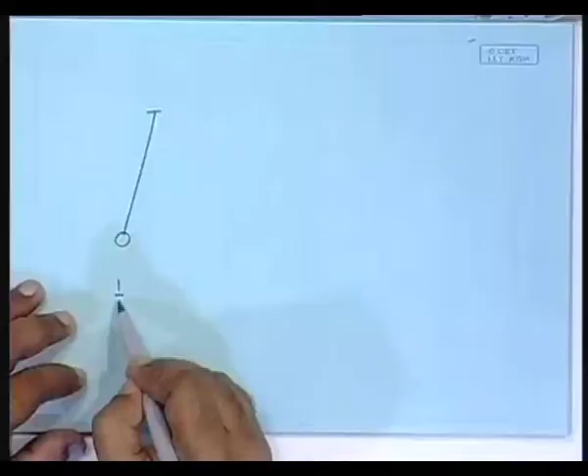As I told you, one possible thing is simply to visualize a pendulum whose bob would move in a to and fro motion with a certain frequency, the natural undamped frequency, which would be 1 by twice pi root over g by L. So that would be the frequency of oscillation if there had not been any additional forcing, but suppose it is given additional forcing a sin omega t - that omega, the frequency associated with it, is an additional frequency component.

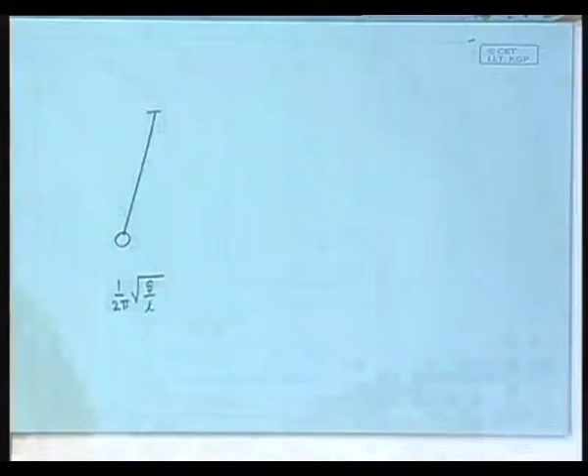That immediately tells you that there are two ways to picture the frequencies. One frequency in this case is the additional frequency imposed from outside, but what is the frequency of this other one? That is the small amplitude frequency, meaning the frequency you can identify under linearization. So that is the natural frequency identified under the assumption that the oscillations are not very large.

So in that case it would be a linear system on which you have given a sinusoidal perturbation. But of course, in a linear system you are not allowing any scope for the two frequencies to interact, right. In a linear system, if there is no nonlinearity, then they cannot really interact. If you add some nonlinearity - in this case if you simply model the pendulum and allow it to oscillate over a large amplitude, it becomes a nonlinear system.

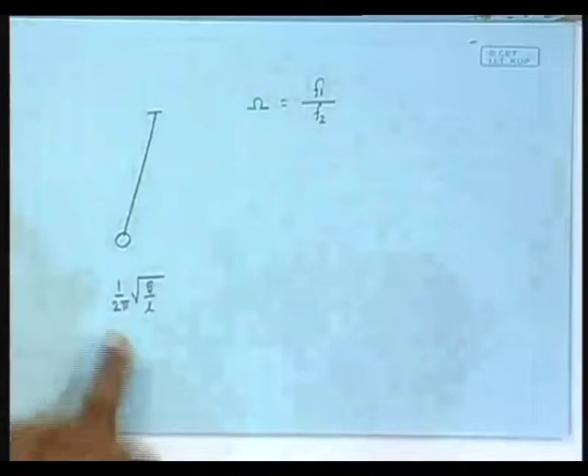So in actuality the frequency will not be this; in actuality the frequency will be something else. So you can identify two types of frequency ratios. One is called omega, which is simply f1 by f2, where f1 is the frequency imposed from outside and f2 is the natural undamped frequency - then this omega is the ratio. Therefore it is not the ratio of the actual frequencies; the actual frequencies of the system are not that ratio. This omega is a sort of idealized ratio, called the frequency ratio parameter.

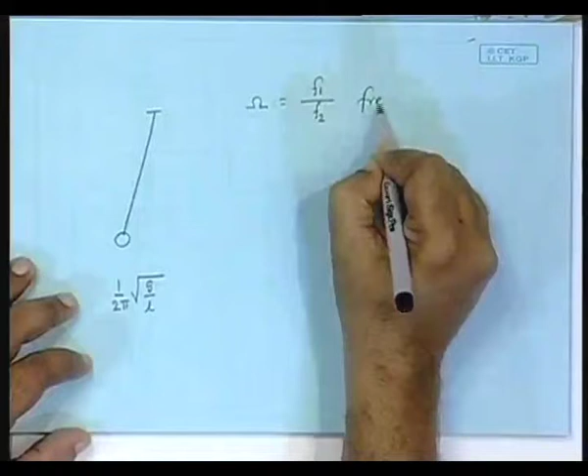And the forcing frequency - yes. But while you are forcing, if you solve the differential equation, you will generally find that it basically oscillates at the forcing frequency. That's true. Ultimately, it will oscillate at the forcing frequency.

Agreed, but still we can identify a number like this, because if you do not apply the forcing, it will oscillate at this frequency, and you have given the forcing, so you can identify, at least in theory, omega as these two frequencies. It's not the actual frequency of oscillation.

So it is just the frequency ratio parameter, somewhat idealized. But the actual thing is called the omega parameter, or winding number, which is f2 prime by f1, where f2 prime is the actual frequency of oscillation of the bob.

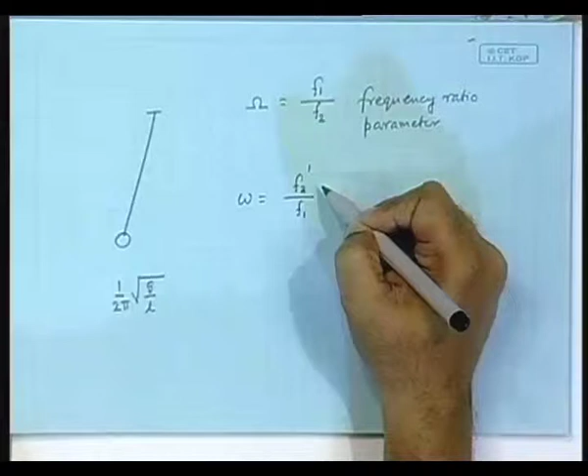So in this case we are allowing the nonlinearities to come into the picture. f1 prime by f2, or f2 prime by f1? Oh, this one would be f2 by f1.

Sorry, so f1 is the natural frequency - no, f1 is the externally imposed frequency, f2 is the natural frequency, and f2 prime is the actual frequency of this oscillation, taking into account the nonlinearity. What is omega called? This is called the winding number.

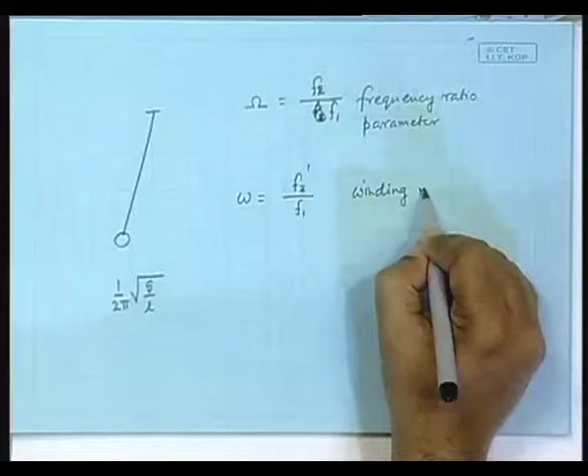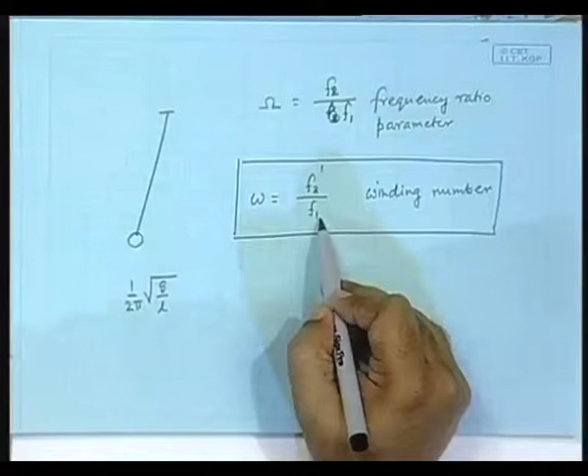Actually, this is the more important thing, because that is what you actually see in the system, and this is sort of an idealized value. It is not difficult to see that if the winding number is a rational number, you have a periodic orbit, and if it is irrational, you have a quasi-periodic orbit. So ultimately our point of concern is the winding number - that is what distinguishes between periodicity and quasi-periodicity. Clear?

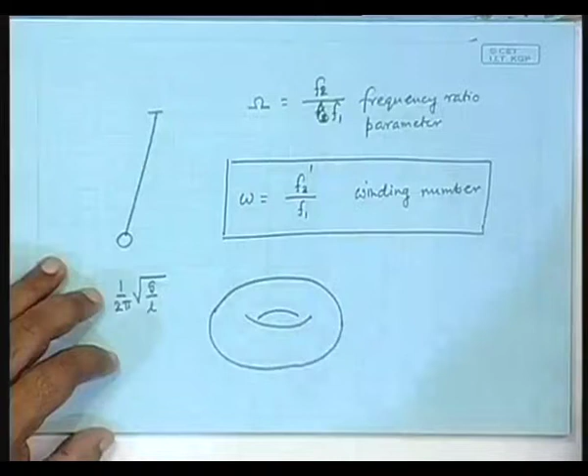So suppose the winding number is 2 by 3. In that case, what will you see happening on the torus? Imagine the torus, and imagine you have placed a Poincare section here. What will you see on this Poincare section? Essentially, the section of the torus would be a circle, but you will not see the full circle, because when W equals 2 by 3, it is a rational ratio, and therefore you will see a finite number of points. How many? Three points.

So what will happen is the three points are here, here, and say here. Starting from here it will go around and hit somewhere here, go around and hit somewhere here, and go around and finally come back here. That is the behavior - by the time it makes 3 rounds on the big circle, it makes 2 rounds on the small circle, and that is why the ratio is 2 by 3.

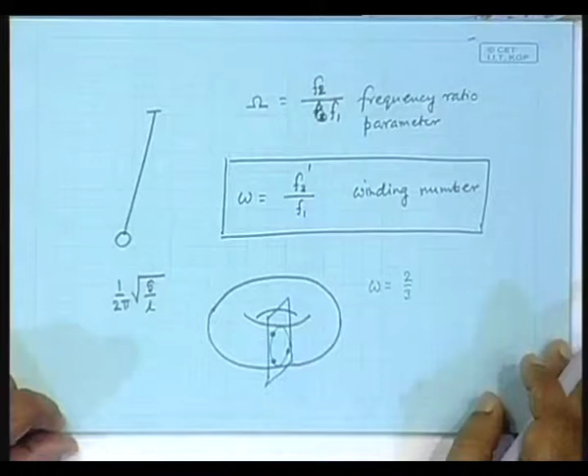Now, how will we differentiate irrational and rational numbers? In the sense that, suppose this f2 prime and f1 - how can we say it's irrational or rational in a real system, since we cannot always say it's exactly 2 by 3? His question is how can you really say it is rational or irrational, because in the immediate neighborhood of every rational number there is an irrational number, and in the neighborhood of every irrational number there is a rational number. How can you say that?

Yes, of course you say this with finite precision of your calculation, but soon we will see that we can do a lot of coarse-grained calculations - just wait till the end of this class, I will explain how. Because of the mode locking, as I explained in the last class, mode locking happens over a large parameter range, so the rational ratios will occur for a large parameter range. That is what allows us, even with rough, finite precision arithmetic, to calculate and find out that it is really a rational ratio. But we will come to that.

The point is, let us now develop this circle and see what is happening. Suppose here is a circle, and suppose there is a point - not exactly this situation, but another one - the initial point is here, and before coming to the next one it has gone around once and fallen here. It is possible. Now, will the Poincare section be able to distinguish between these two situations? No.

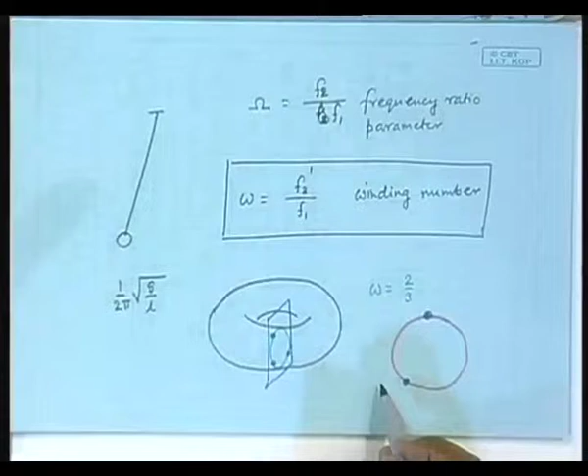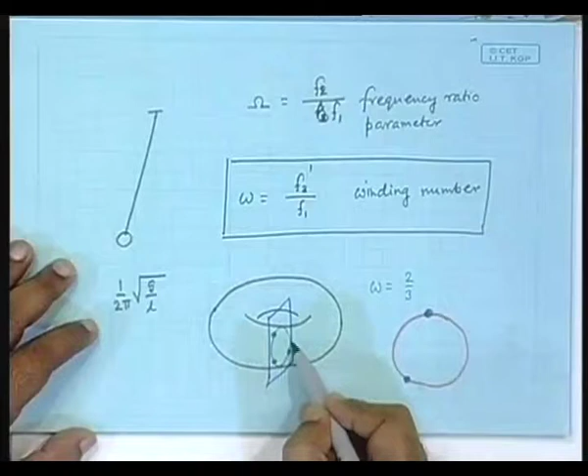That means it started from here, and as I explained, it goes around and comes back here. Suppose it does not do so, rather it goes around once more before coming here.

Looking at the Poincare section, we will not be able to distinguish it. That is why when talking about these mappings, there is no point discussing 2 pi rotations. That is why you always take a modulo 2 pi, or if you say the whole rotation is 1, then you take a modulo 1. You understand what modulo 1 means?

That means you subtract all the whole numbers. So if the winding number comes out to be say 1.7, this simply becomes 0.7. As far as the Poincare section is concerned, 1.7 is the same as 0.7. But we have to understand that something has gone on - it has gone around the small circle one more time without intersecting here. We have to keep this in mind, but on the Poincare section that might not be visible.

Now let us come to a very simple situation by which we can understand these things. Whenever we were talking about dynamics, we found it very convenient to understand things in terms of maps. We have understood the logistic map, its behavior, how to calculate the fixed point, how to find the stability of a fixed point, and on that basis we can do a lot of things.

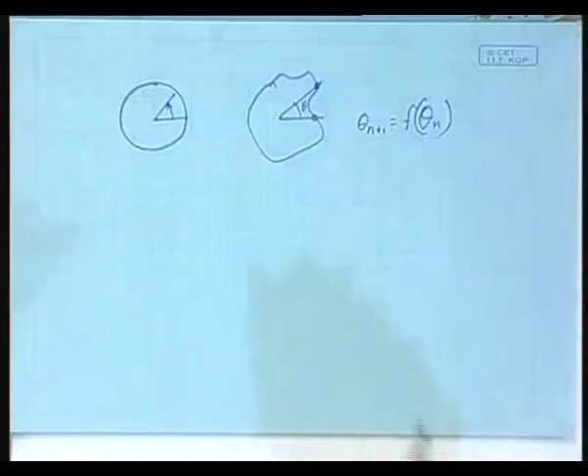So it will be convenient for us to define theta, and if we can define something like theta n plus 1 equals a function of theta n, we are through - we can define the dynamics. So the cross section of the torus is a topological circle, meaning that if it is an ellipse, it is still topologically the same as a circle - it is a closed loop, that is all.

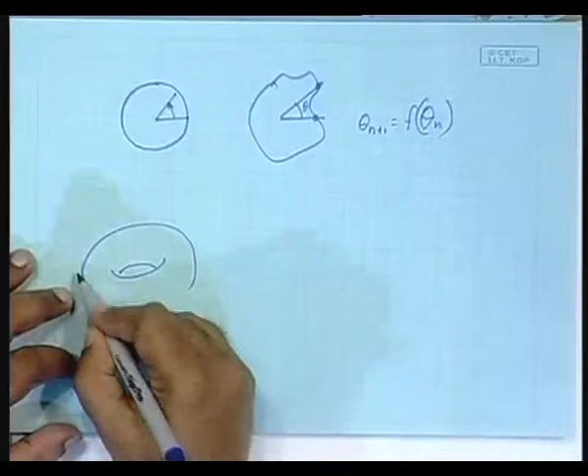So how do we define the center? Center you don't need - but to find the angle we need the center. No, you don't really need the center, though you do have the center. Wait a minute, you do have the center, but you don't need it. Why do you have the center? Because how did this torus come into being?

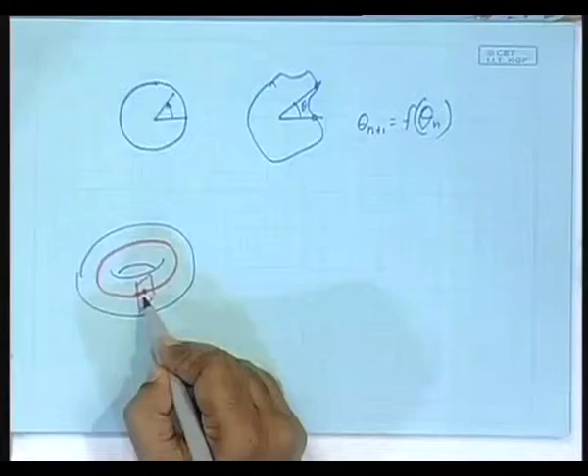Initially it was an orbit like this, which became unstable, right? When the orbit was like this, if you place a Poincare section, it was a point that became unstable. When it becomes unstable and develops into a torus, still this unstable periodic orbit is there, and that can serve as a center.

So the unstable periodic orbit is there, so that can serve as the center - though normally anything inside the closed loop can serve as a reference point from which you can measure theta. But it would be convenient for us if we can locate that unstable fixed point, to measure from there.

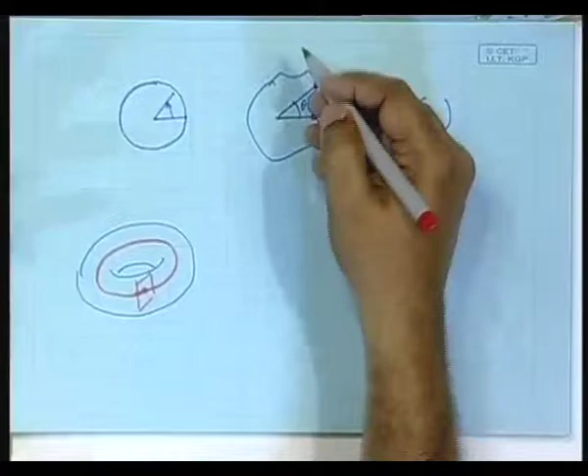The point I am making is that when you are defining in terms of theta, you do not really need to consider whether it is bent or crooked or whatever, so long as it is a topological circle, it is fine. So long as you can eat the donut as a donut, it is fine. So we have to define it something like this.

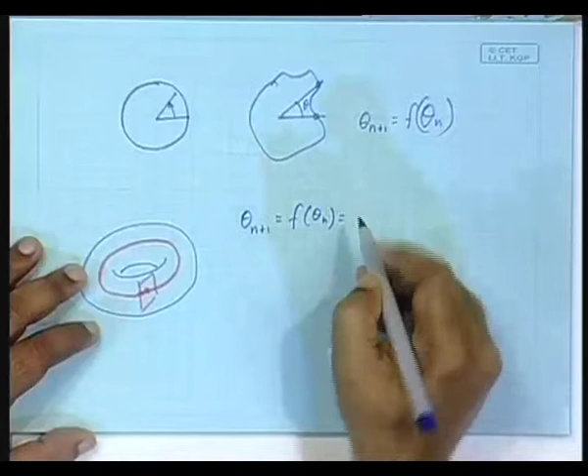Okay, now if we can define it like so, I will define a map and see if you can see what I mean: theta n plus 1 is equal to f of theta n, which is equal to theta n plus omega.

What is this omega doing? Suppose initially theta naught was only this much, meaning it starts from some datum line, from this point. Then in the next iterate, what happens? It turns by an angle omega, and comes here.

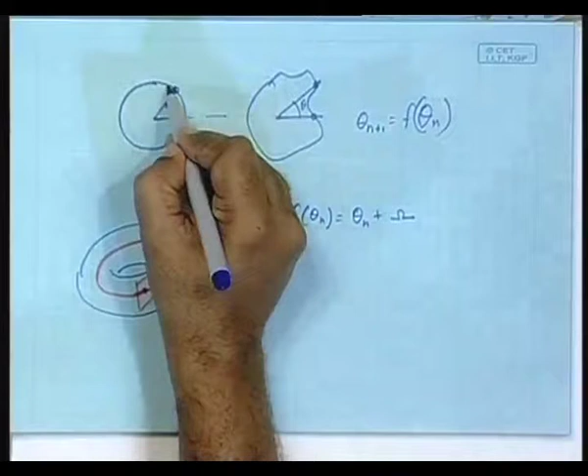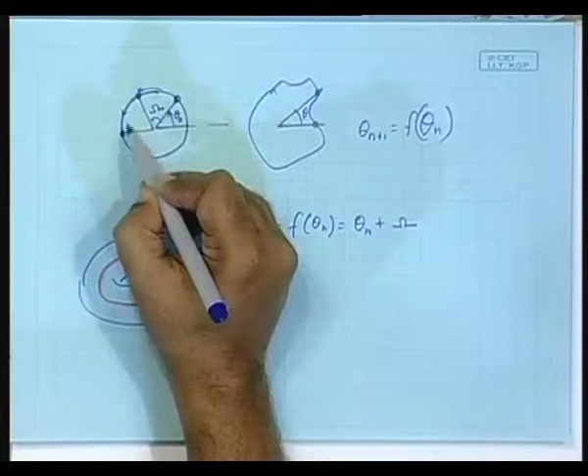In the next iterate, it again turns by an angle omega, and so on and so forth. You might say this is the same omega. Yes, it is the same omega, I will come to that, it will turn out to be the same omega. Should we multiply by 2 pi omega?

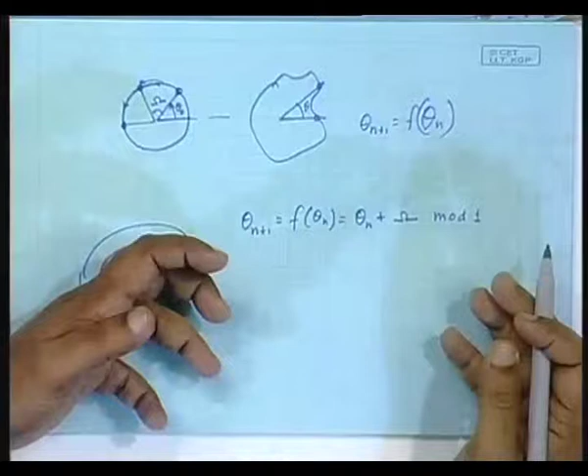No, wait, here things are normalized so that the full circle is 1. We have normalized it so that going around the whole circle is 1. That is why his question is valid. This should actually be written as mod 1, because if omega is greater than 1, it really makes no sense. As far as the Poincare section is concerned, it will turn only by the remainder part. So if omega is 1.7, it will turn by 0.7.

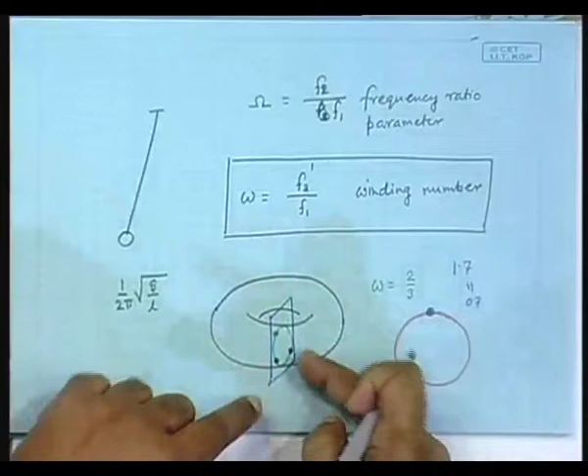Okay, then what is this fellow doing then? It is turning in each iterate by this much. What is happening on the system description? Starting from here, it goes around and then lands here. In that time it has turned by an angle omega. Again it has gone around, and by the time it again lands here, it has turned by an angle omega, and so on and so forth.

Omega, small w? No, it is omega. It is omega because it is a linear system. There is no interaction between the two frequencies, that is why I am saying that. Okay, so it is omega, I'll explain how.

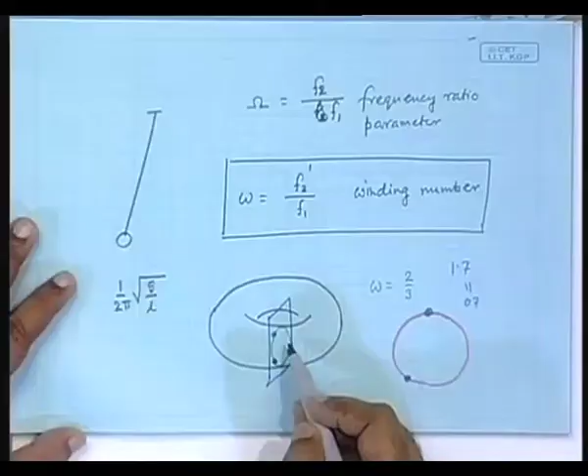So what is it doing? It is simply turning by this much. Now if I ask you, what is the winding number? Can you figure out the frequency ratio? By the time it comes through one of the turns, it is turned by an angle omega.

So what is the W in this case? Omega by 1. It has turned by omega around the small circle, and by the time it has gone around the big circle, it is omega over 1, it is omega. So in this particular case, your winding number happens to be equal to omega. Yes, because it is a linear system.

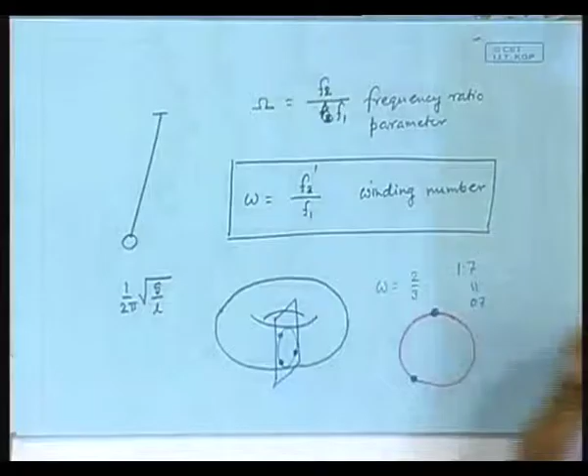So normally, how would you define or calculate the W, the winding number, looking at the map? Here we had defined it depending on the frequency ratios. We assume you can do an FFT and identify the frequencies. But suppose we do not have that, we are only able to see what is happening on the Poincare section, then you only have this map available to you.

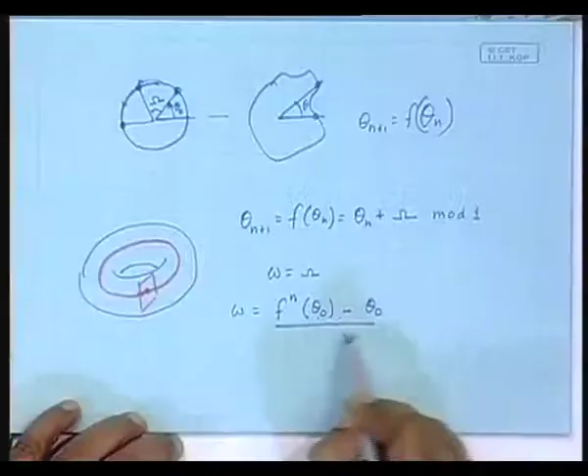Then the definition of W is: in each mapping, it turns by an angle omega, right? In n number of mappings, it turns by angle n omega. Generally speaking, if such a map is given, if you take f n of some theta 0 and subtract theta 0, you find out how much it has turned in n iterations. Remember, do not take mod 1 at this stage, because you really want to calculate how many times it turns. Divided by n gives you the average turning per iterate, and that is omega.

Okay, in general, only in this particular system does this come out to be your omega. So in this case, only the W is equal to omega. Oh by the way, this has to have a limit n tends to infinity, because we have to consider the transient dying down, and that should converge onto the actual value of the winding number.

Okay, in this particular system, what is happening? You will say W is equal to the limit as n tends to infinity of n omega plus theta naught minus theta naught, divided by n. That is why it is omega for this particular system.

Well, so this is our definition of the winding number given any specific map. So is the grounding clear?

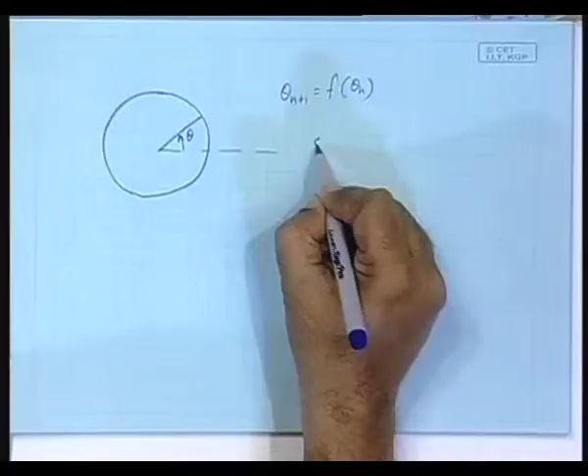Now once this grounding is clear, we can introduce a very special map that has been very well studied, because almost all the phenomena that happen on the torus can be understood in terms of this map. It is called the sine circle map. In some books you will find it simply called the circle map, because it is a map on a circle.

It is theta n plus 1 equals theta n plus omega, the same as the earlier one, minus k by twice pi — this is only to normalize it — sine of twice pi theta n. We have to do a mod 1. So this is the expression for the map.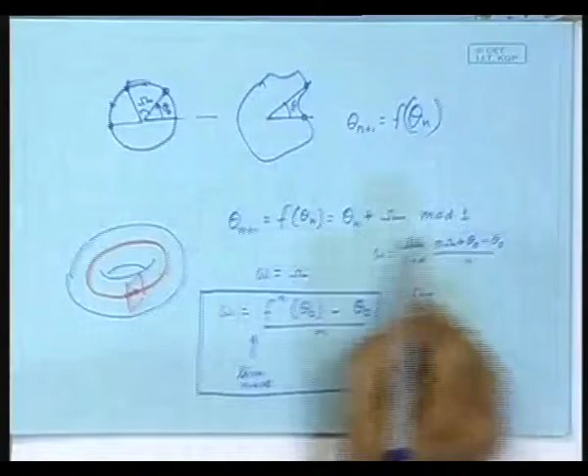Now you would notice that if k is equal to 0, it is the same as the circle map we had earlier. This is a linear map, and this with k is a non-linear map, and the non-linearity is quantified by this term k. So this is the non-linearity parameter.

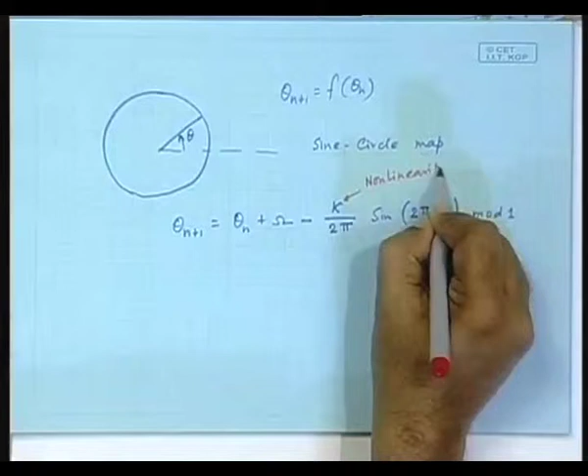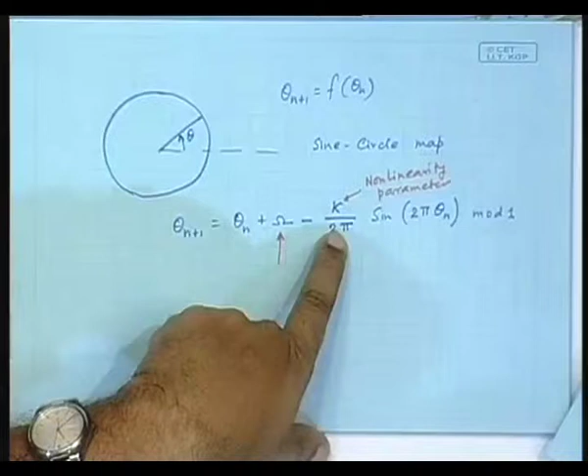And this system actually has two parameters. This one is the frequency ratio parameter. See, we had started from the frequency ratio parameter, the bare frequency ratio. So what we have here is the same as the bare frequency ratio when the nonlinearity is 0. So this is the frequency ratio parameter. There are two parameters in this system.

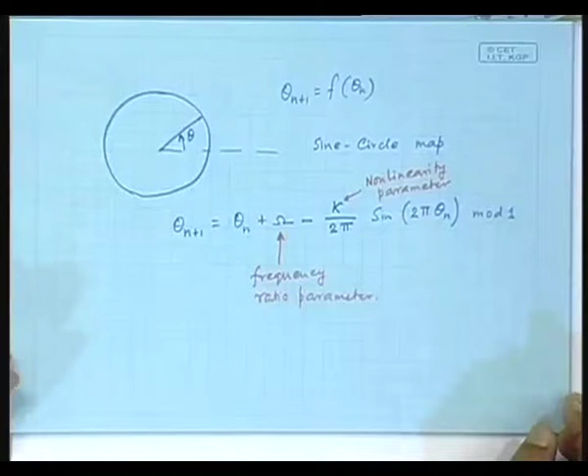Now let us try to understand how the behavior will be. First, if k is equal to 0, can you draw the graph of the map? K equal to 0 means the old system. It is a map, so you can draw a graph of theta n plus 1 versus theta n. Can you draw it?

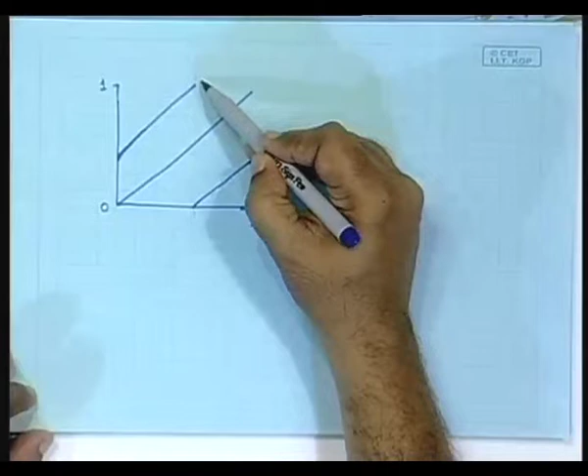Suppose this is the 45-degree line. Then theta n plus 1, so it's a line with slope 1, till it reaches the value of 1. Then mod 1, so it jumps here and goes again. That is the character of mod 1 — it comes down here and then grows. It's not actually a discontinuity in the real sense, because it continues like this, but since we are taking mod 1, there's no point looking at how many times it turns around the small circle, so we started it from here.

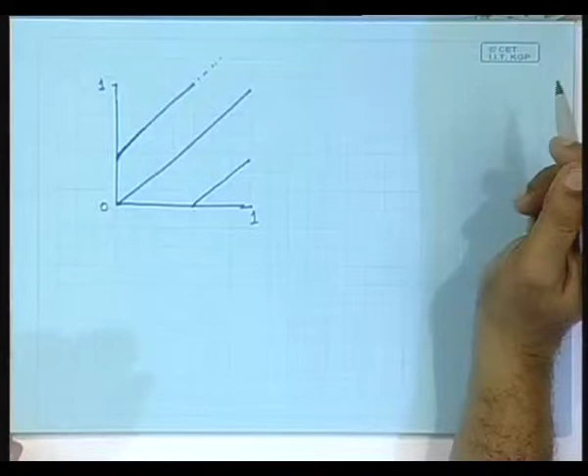This system can only keep on turning, and since omega gives the amount by which it turns — omega is the same as w — if this omega is rational, we get a finite number of points. If omega is irrational, we get an infinite number, a drift ring. That means it will have a ring with all the points filled up if it is irrational. That is the behavior of the original system without k, that is, k equal to 0.

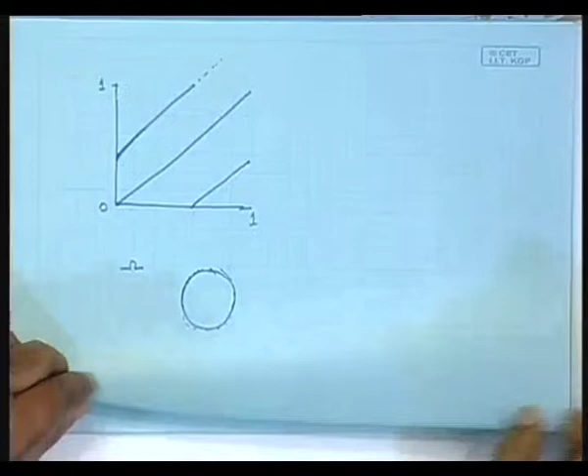Now if you take a small value of k, it results in a bit of non-linearity — it was going like this, it will have a bit of a bend, then start again from here with another bit of non-linearity. So instead of being a straight line as for k equal to 0, it becomes like this for k small, and for k large these bends become large bends, then it starts here again.

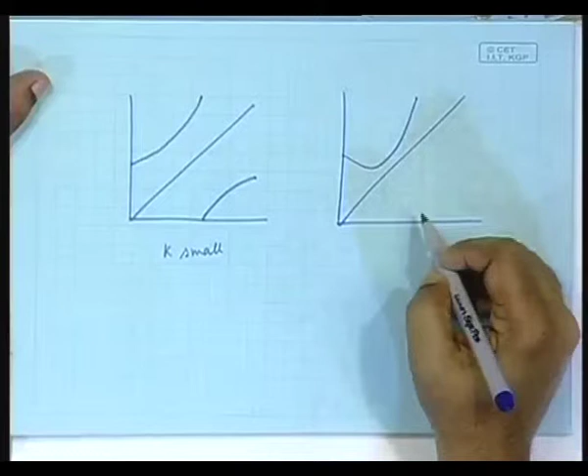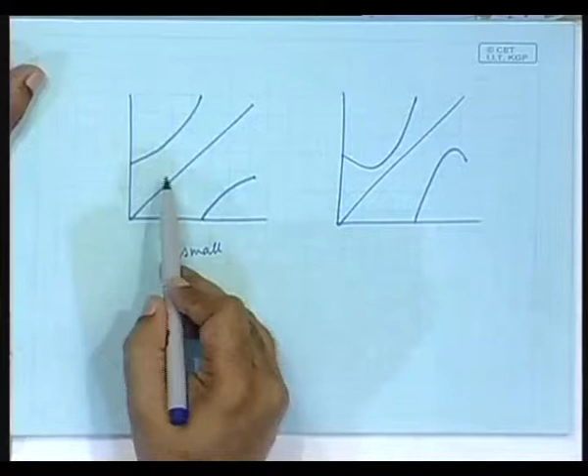So this bend becomes a large bend. As a result, at this stage it is invertible, but here it loses invertibility, because for every theta n there is a unique value of theta n plus 1, but for every value of theta n plus 1 there are two values of theta n. So you can come down to it in two places, and we have seen in the case of the logistic map that this leads to folding. So there would be a lot of complicated dynamics possible in such systems, but let us work things out somewhat through logic now.

Okay, now let us write down the map again. How to find the fixed point of this one, and when will the fixed point exist?

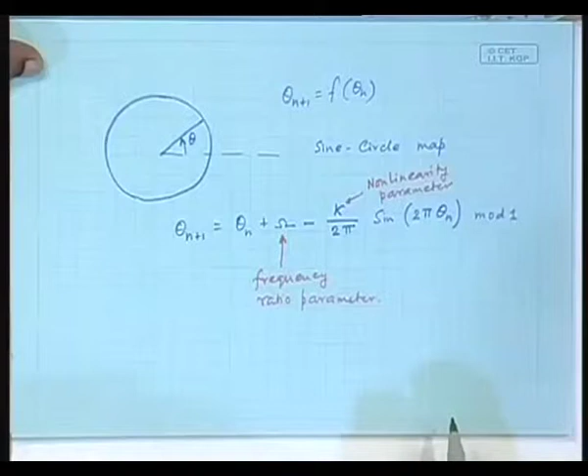So in order to calculate the fixed point, we will say theta star is equal to theta star plus omega minus k by twice pi, sine twice pi theta star. Theta star is the fixed point, it cancels off.

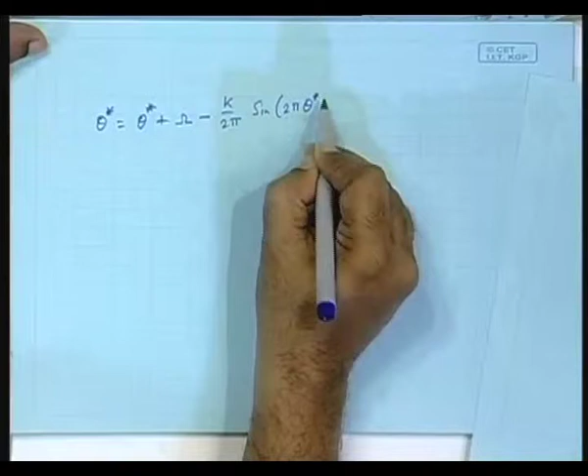That leads to k by twice pi sine twice pi theta star is equal to omega, or sine twice pi theta star is equal to twice pi omega by k.

As you know, sine of something has to be between minus 1 and 1. So long as k is above 2 pi omega, we are through - we will have this fixed point. So the condition for existence of the fixed point is that k greater than equal to that. So we have two parameters, k and omega, and if this relation holds, you conclude that there will be at least one fixed point.

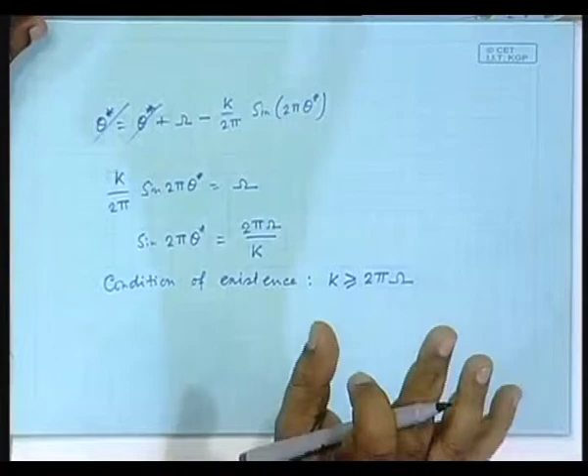Clear? Fine. Suppose we have located a fixed point. Can you figure out what the behavior will be on the torus? Suppose we have located a fixed point, we have satisfied this condition, and depending on this condition, suppose I have located a fixed point. How will the fixed point be?

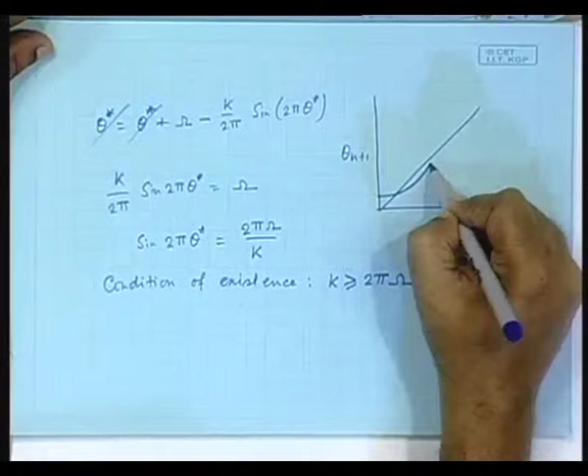Here in the graph, at some value it will go like this. So you can easily see that here is a stable fixed point, here is an unstable fixed point. Beyond this value of 1, it will again start from here, so it will be something like this. But nevertheless, we have identified that there is a fixed point here, a stable fixed point here.

Starting from any initial condition, it will ultimately converge onto that. And suppose it has converged, can you figure out what the behavior will be on the whole torus? Yes, what is your question?

So if k is greater than 2 pi omega, then a stable point is existing? No, I have said a fixed point is existing. It does not mean that it is stable. I did not mean that it is stable. I have only worked out the existence condition. I did not work out the stability condition. We will have to work that out separately.

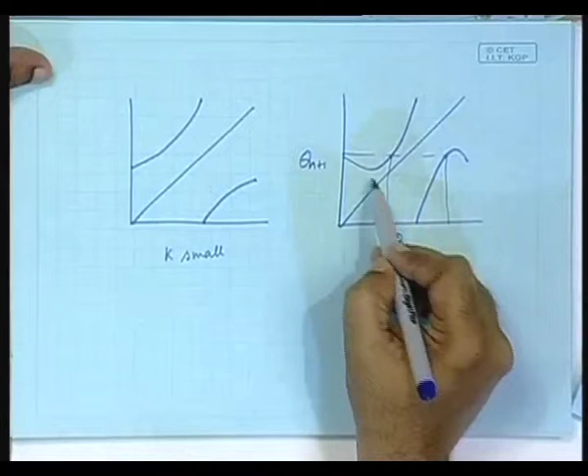But supposing we have satisfied the condition and found a stable fixed point, because the more you increase the value of k, the more bend there will be. It is not difficult to see that beyond some value it will be a behavior like this. So you are expecting a saddle node bifurcation, as a result of which one fixed point will start to exist, and when it starts to exist, it will be stable. Later that may lose stability, that is a different issue.

Now, when it is stable, what is the behavior? See, here is the circle on which I am talking about the thetas. It started from, so suppose this is your theta star. That means once it is here, in the next iterate also it is here, the next iterate also it is here, and so on and so forth. So what does it mean? It means that it does not rotate in this small circle, it only rotates in the big circle and comes back here. So what is the frequency ratio?

0 by 1, okay. So here the winding number is clear, or 0. By the time it comes back through the big circle, it does not rotate in the small circle, and therefore the winding number is 0.

So we can also say it to be 1? No, wait. It is possible, but under some condition where it goes around this circle once and then lands here - that will be 1 by 1. So under what condition will that happen? If you forget about this mod 1 and calculate this, you can easily calculate the condition under which that will happen. So you can calculate the condition under which omega will be 1.

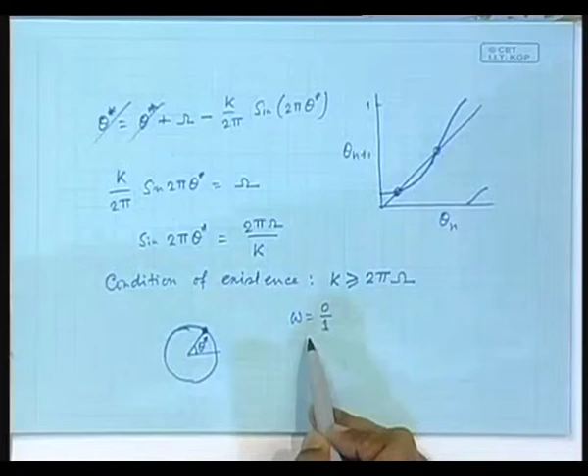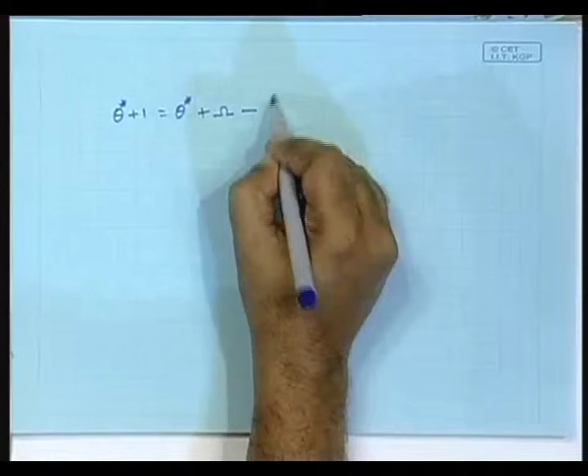Since you have raised the question, let us do it. What will you say? You will say theta star plus 1 is equal to theta star plus omega minus k by twice pi sine 2 pi. Do it, you will get it. So you solve this equation, you will get the condition.

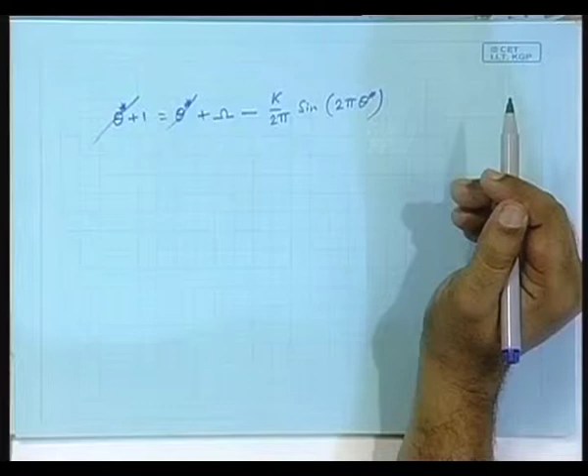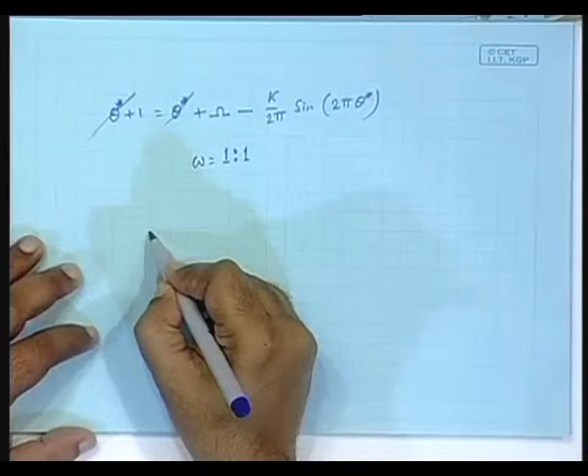Got it? So there will be another parameter range for which this theta star solution will lead to omega equal to 1 to 1 ratio, or the omega will be 1. I am writing 1 to 1 because I want you to understand what is happening. Here this is the circle.

This is actually the cross section of this. By the time it goes around, it comes back again here, so that it turns in the small circle once. You can easily find out the condition, do that.

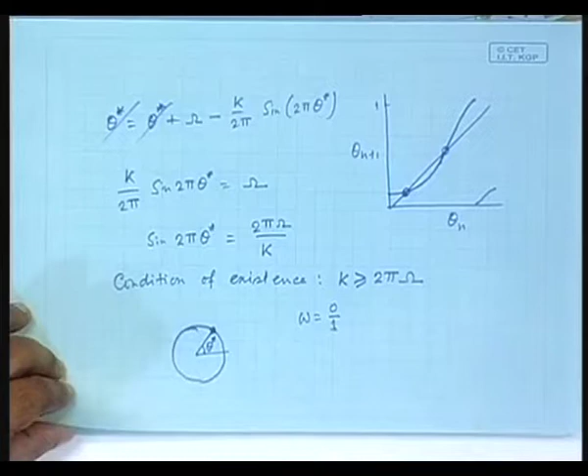But now somebody raised the question: supposing this fixed point exists, will it be stable? How will you find out the stability condition? Slope, right? So all you need to do is calculate the slope.

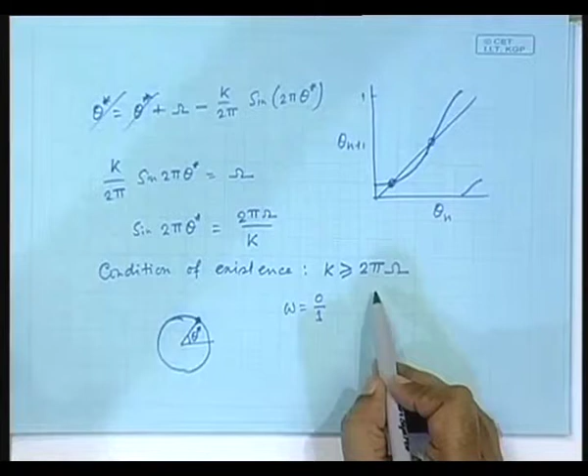We will be able to say this fixed point is stable when we know there is a range, a point at which it comes into existence and a point at which it becomes unstable, right. So in order to calculate that, we will have to differentiate it.

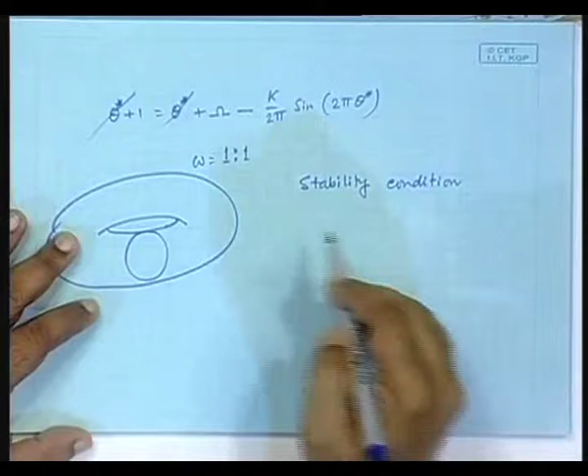So df d theta is 1 minus k cos twice pi theta, right. Check it out. 1 goes off, twice pi comes forward, it gets cancelled. So k cos, so this is what...

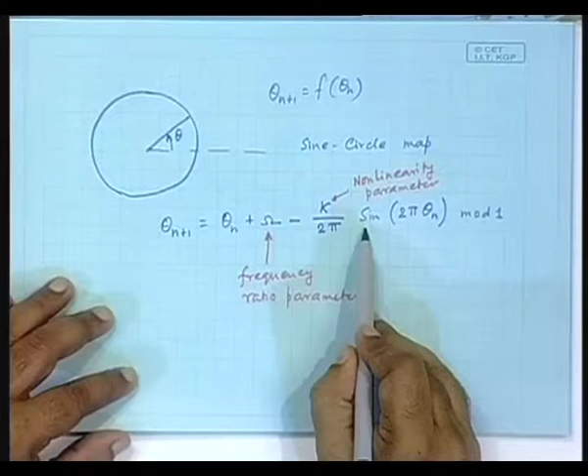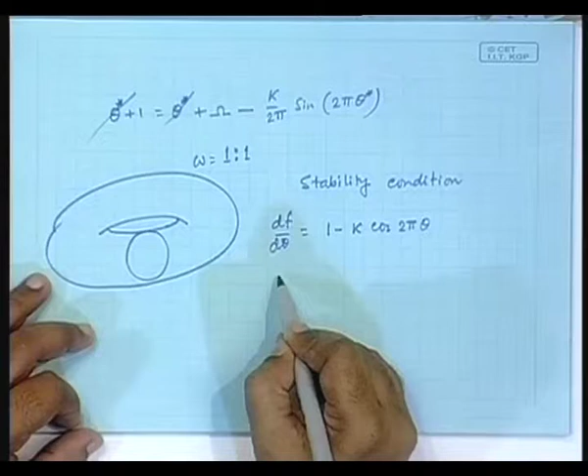And it becomes unstable when this fellow is 1. So you have to put this as 1 and solve for it. So it will be stable for a parameter value between -1... that immediately gives you a range of theta.

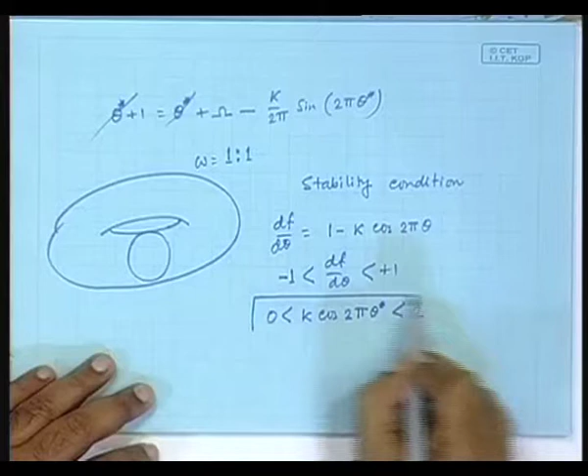So that will give you the parameter range 0 less than k cos twice pi theta star less than 2. That is the condition under which the fixed point will be stable. So we have found the existence condition as this and the stability condition as this. When both are satisfied, your 1 to 1 ratio is satisfied.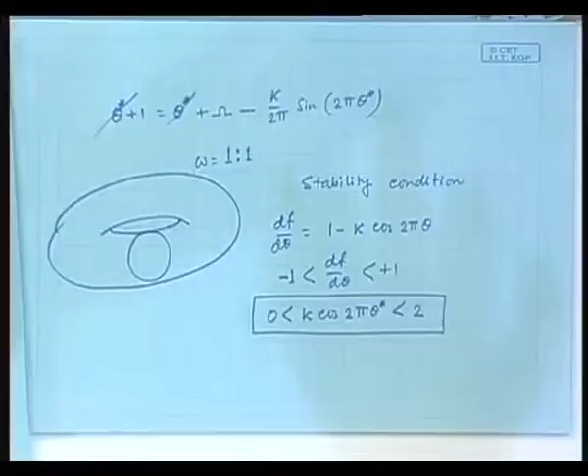Again, I showed you how to calculate the range for the 1 to 1 ratio. You have to do the same thing to find out the range in which it is stable. So you can easily see there is a parameter range in which the 0-1 ratio is stable, and another parameter range in which the 1 to 1 ratio is stable.

Natural question is, how can you calculate the 2 to 1 ratios, 1 to 2 ratios? That means we are talking about mode locking now. We are essentially probing the phenomenon of mode locking. I said the moon is mode locked. Moon is mode locked in what ratio? 1 to 1 ratio.

Mercury is mode locked in 3 to 2 ratio. But there are many other satellites that are mode locked in other ratios. They are still mode locked. There are some 23 moons of Saturn, and many of them are mode locked in different ratios.

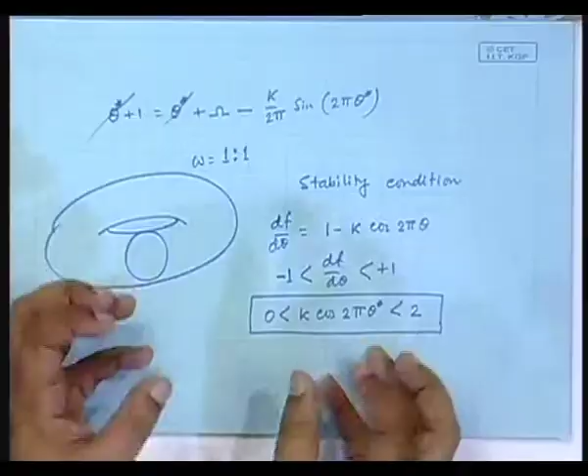So obviously we are trying to understand these ratios, and in practical systems, in electrical engineering experiments, in mechanical engineering experiments, you will get an enormous number of situations where you have these sequences of mode locking windows. These are very common in fact. So we are trying to understand that in terms of a toy model, and the toy model is simple enough.

So let us try to understand when and under what condition there will be a 1 to 2 ratio. Intuitively speaking, when a period 2 orbit exists in the system, let us try to understand what actually happens on the torus. So we have got the map. I am talking about the period 2 orbit of this map. So can you find out when the period 2 orbit will exist?

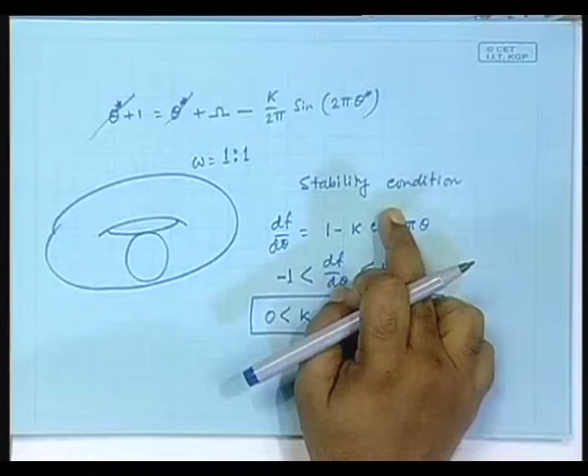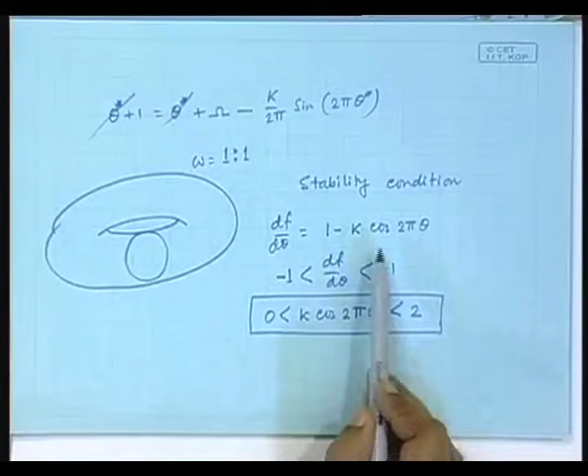Simple. We know, we have already calculated the stability condition, and we know the period doubling happens when the derivative becomes -1. So we take that condition of -1, that would be when the 2... this side is there, right, so this is equal to 2. If you push the parameter k beyond that range, then you get a period 2 orbit. That is what we have learned from earlier classes.

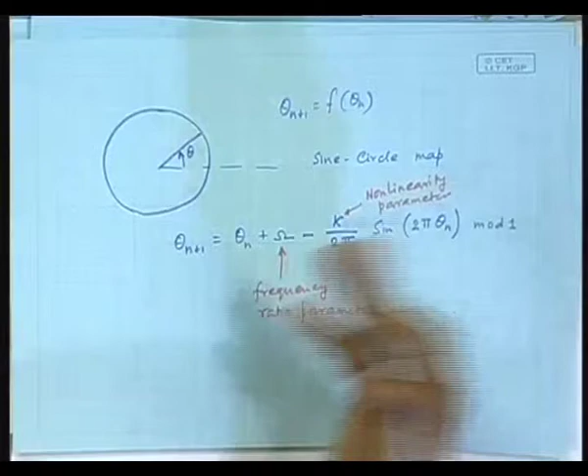Well, so we need to find out the ratio. We can also do this: we can obtain theta n plus 2 in terms of theta n, same thing as we did in the case of maps, and find out its existence as well as stability conditions. Both are possible, both routes are possible.

Now, once we have found that, what we will get on the circle... we will get 2 points, right, say here and here. What does it mean? It means that starting from here, it went around the big circle and landed here, went around the big circle, it landed here. Okay, so that is the behavior here.

It may be also true... look at... look at the graph of the map.

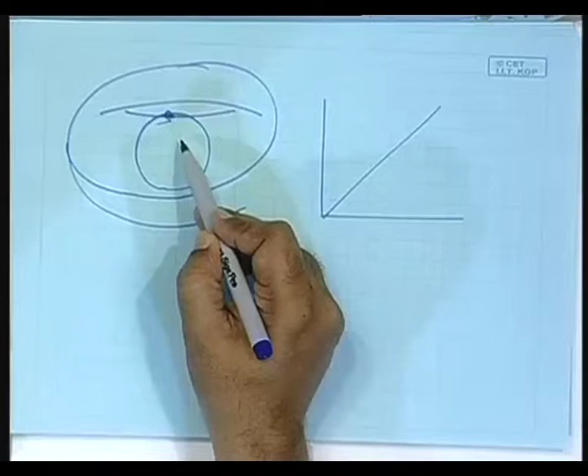Well, when that happens, what is the ratio? No, there is no 3 here. It started from here, went around it, and landed here. So again try to visualize. It started from here, went around it, landed here, went around it, landed here. By the time it went through 2 circles here, how many times did it go around this? Once. So it is 1:2 ratio. It rotates like this once, while it rotates like this twice, 1:2 ratio.

Likewise, there would be some parameter range at which it will become a period 3 behavior. Say it becomes period 3 means there would be 3 points. Starting from here, it will go around it, land here, go around it, land here. How many times did it go around the big circle? Starting from here - once, twice, thrice, 3 times. How many times did it go around it? Once. So you have a 1/3 ratio, but not always.

See, the graph of the map has this kind of a property. This part is the range at which the next iterate is between 0 and 1, and if it is in this part, theta is in this part, then it has actually gone beyond. So it has been brought down, which means that if any iterate lands here, it has actually gone once around it. So here the mod 1 has come into picture, but you have to understand that if any iterate lands here, it means that in between it has gone one additional time.

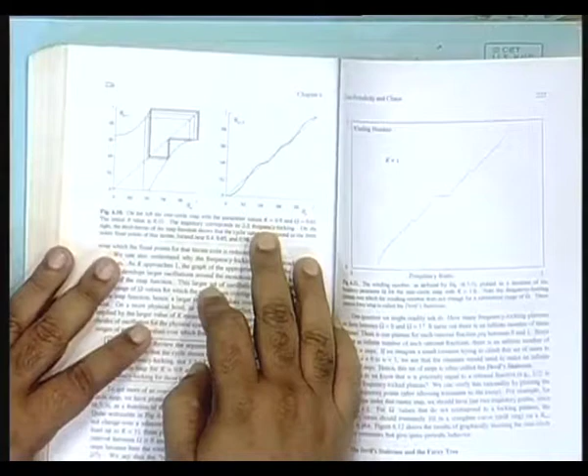For example, I have a situation I can show you, probably from the book. This is Hilborn's book. Can you see this picture? So you see here there is a period 3 orbit. Out of that, 1 was in the smaller range and there are 2 in the bigger range. That means there were iterates falling in this part. Iterates falling in this part means it had gone twice. What does this ratio signify? 2 by 3. Because in between it has gone twice, there are 2 iterates here. So 2 by 3, this particular period 3 orbit means 2 by 3.

So you see, we are able to understand the mode locking ratios in terms of the simple map. And in fact, all the higher periodicities are possible, and all the higher periodicities mean different types of mode locking windows.

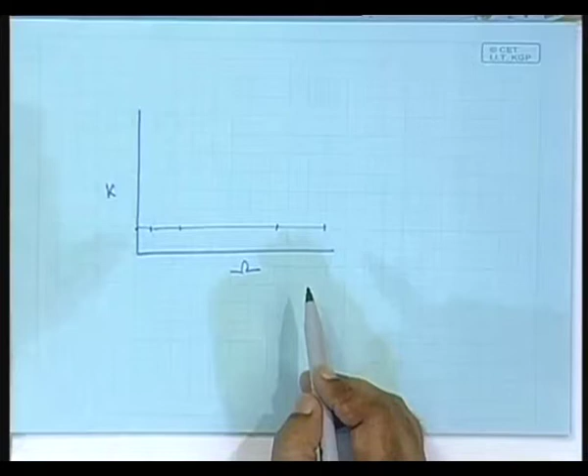Now you might ask, how big are these windows? For example, if I keep k constant and vary omega, then what do we expect? You understand my question? These mode locking windows - in that case we can paint a picture in the parameter space with omega here and k here, which means that if you take a slice here, for this value of k, as you change omega, there would be some range for which 0-1 mode locking will occur, there will be some other range for which 1-1 mode locking will occur.

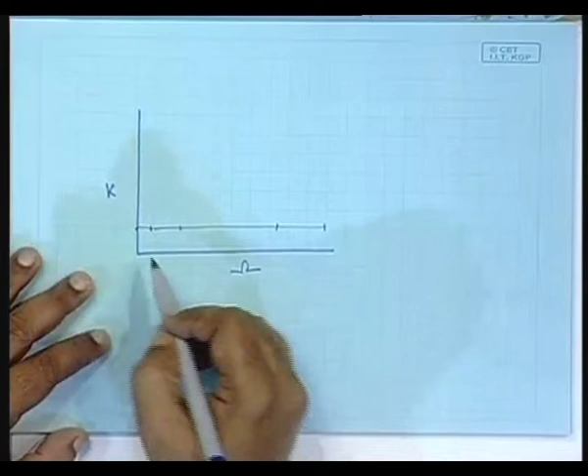And there will be all those intermediate ranges in which the intermediate mode lockings will occur. And it so happens that if you draw graphs, it will be something like this. This is the 0 to 1 ratio, here is the 1, 0 to 1, here is the 1 to 1 ratio, and like so is the 1 to 2 ratio.

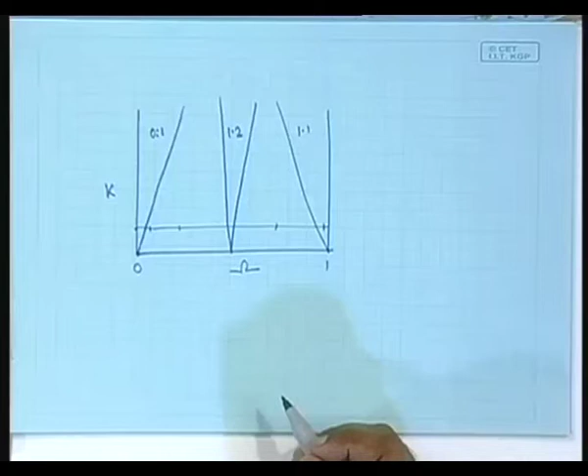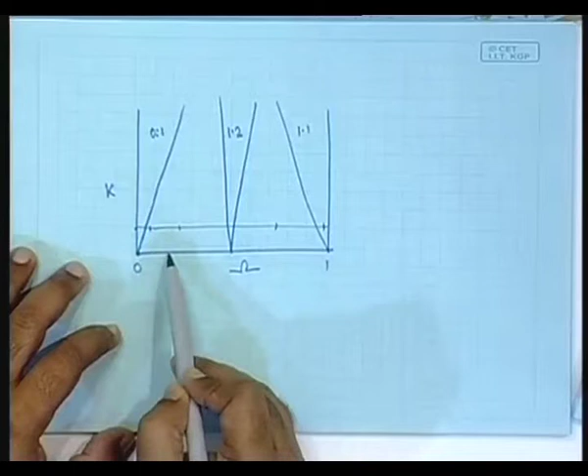You might ask why and how. Well, these widths are relatively difficult to calculate from the map itself, because the map is a nonlinear map, but you can always do that simply numerically - find out for which range of omega do we have a 0-1 mode locking, which range of omega do we have a 1-2 mode locking.

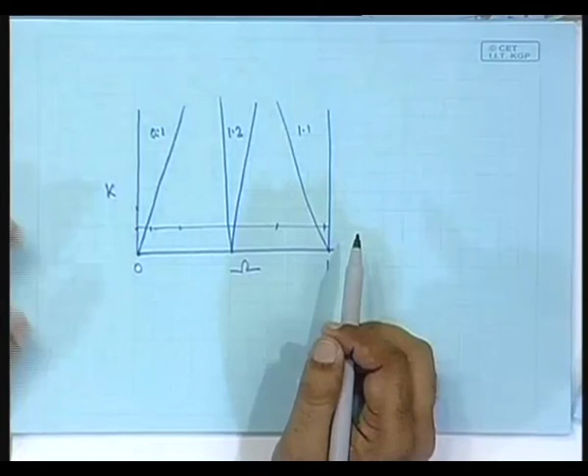Can you visualize how the bifurcation diagram will be if you keep k constant and vary omega? You already have the program written for obtaining bifurcation diagrams. You have got the system, you have got the map. Just do this exercise of keeping k constant and varying omega as the bifurcation parameter and draw the bifurcation diagram. You will see a wonderful thing. Do this exercise because you already have the program written up - that was an exercise given some time back, so you already have it. Do it and come back with that knowledge in the next class. Then I know you will come back with a lot of questions - why is this happening? And then it will be my job to explain that.